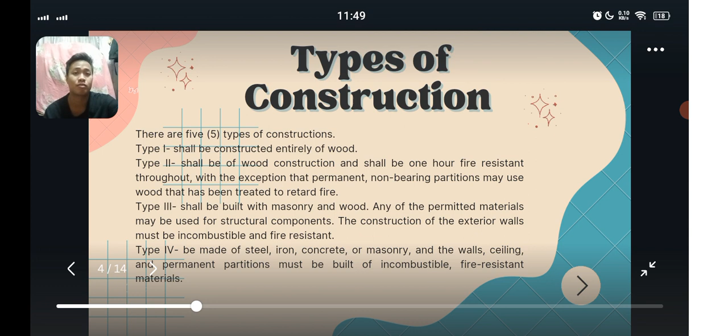So we're going to the next slide: fire resistive requirements in construction. Knowing the fire resistance of different types of building construction will help managers determine what type of building is good for their business. This helps by lessening the risk of loss to the business and preventing it as well.

Of course, when it comes to business, we need to lessen the risk so we don't suffer losses and we can prevent it before it happens. So that's for fire resistive requirements in construction.

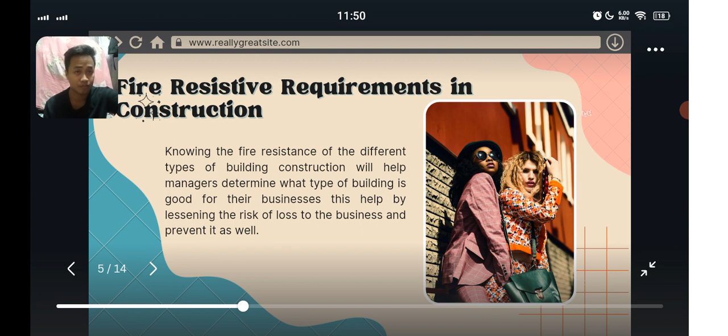Fire resistant standards. So we have six: floor construction or solid RC slab, solid pre-stressed concrete slab, partitions, protection for metal structural members, exterior wall, and the last one is column.

So fire systems, all building materials as well as their types, assemblies, and combinations must adhere to the fire system resistive rating. Kailangan na sobrang resistant siya when it comes to fire. Hindi dapat basta-basta matatalo ng apoy yung nag-aawang building o masusunog agad-agad. Kailangan mo talaga ng pinaka-advanced na fire resistance in a building.

To maintain the fire integrity of neighboring structures, all existing openings on all firewalls must be completely sealed. Kailangan nakaseal yung buong bahay, which is walang bintana sa likod o sa gilid ng mga bahay, para kung may mangyari man na sunog, yung apoy ay nasa loob ng bahay lang, hindi na siya kakalat pa. So depending on how the building is used, particularly for ventilation, there are exceptions.

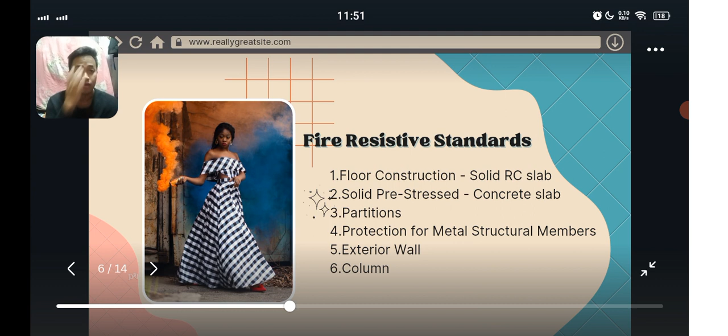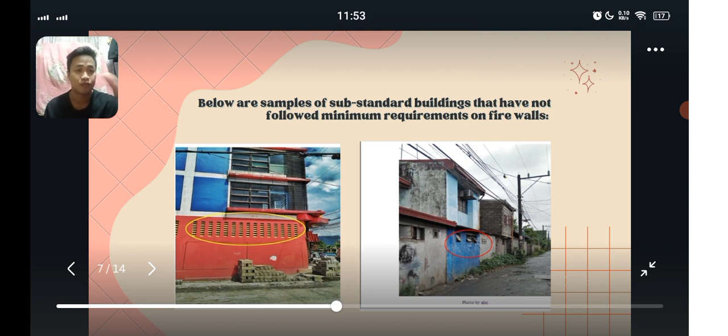Below are samples of substandard buildings that have not followed the minimum requirements of firewalls. Itong mga nakabilog ay yung mga hindi nila sinunod. Hindi ito pwede kapag nagbuild ng building, kasi maaaring lumabas yung apoy at kumalat sa mga katabing bahay. So that's the example of not following the minimum requirements of firewalls.

So, maximum building heights. The proposed building's maximum height and number of stories will depend on the type of use or occupancy, the type of construction, and the following factors: end user population density, light and ventilation, width of roads and streets particularly its roadway, carriageway component, building bulk, off-street cum off-site parking requirements.

The maximum height and number of stories of a proposed building in relation to environmental factors, local zoning laws, and land use plan, which includes geological, hydrological, meteorological, or topographical factors. Then the next one is current traffic situation, availability and capacity of public utility and service systems.

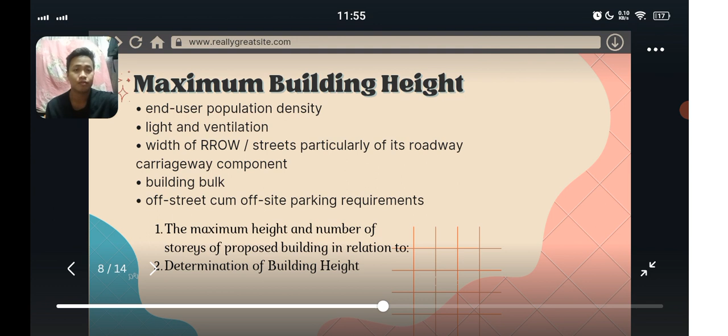And the next one is determination of building height, which is building height limits, or BHL, are generally calculated from the established grade line to the topmost part of any proposed building or structure, and they must comply with the NBC rule. So that's for maximum building heights.

So the example of it is these pictures. The first one is the highest adjacent natural grade, which is ground surface or finished grade, and side of surface perpendicular to row with a difference in elevation of less than 3.00 meters shall be used to determine grade elevations. The next one is the average grade level, established grade elevation for sloping grades perpendicular to row with a difference in elevation of more than 3.00 meters.

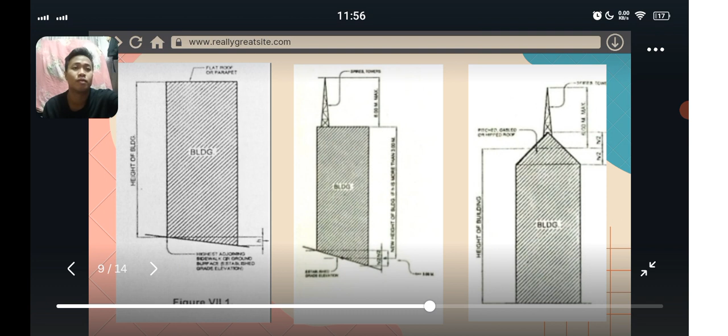The height of proposed buildings and structures shall also be governed by the following road-based limitations. Regardless of use or occupancy, lot size and dimension, etc., a BHL of 3 stories or 9.0 meters maximum shall be observed if only one road serves a lot and such road is only 6.00 to 7.00 meters wide. If a lot has one road and that road is only 4 to 5 meters wide, a BHL of at least 2 1/2 stories or 7.50 meters must be observed.

Kailangan natin siyang i-observe kapag nasa 7.50 meters na siya. If a lot only has one row and that row is only 3 meters wide or less, a BHL of 2 stories or a maximum of 6 meters must be adhered to. Kailangan din natin siya i-adhere.

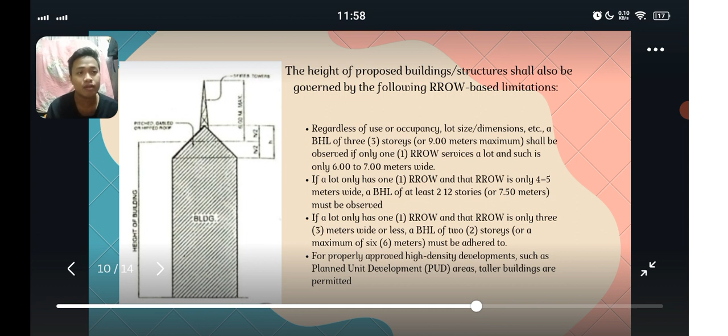The following factors shall also be considered in the determination of building height. First is soil characteristics: a lot's proximity to volcanoes or fault lines, or its location in relation to earthquake belts and other geological factors. The site's water table and distance from waterways and shorelines are examples of hydrological conditions. Ito yung binanggit natin kanina na fault siya. Dito sa may fault, dito sa may first part, ayan, nandito na siya.

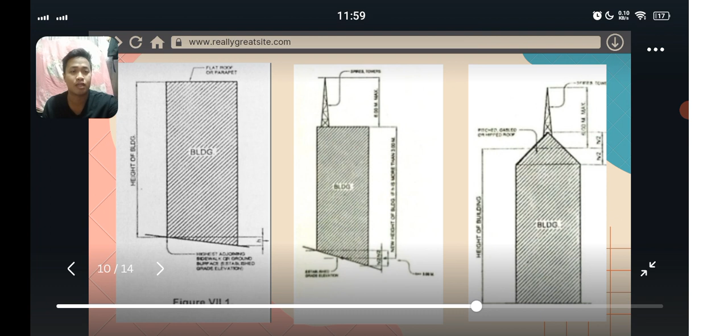Next, the third one is prevailing wind speed and direction, relative humidity, and how frequently and intensely destructive typhoons, monsoon winds, and rains occur. Kailangan matibay talaga siya. So, effects of environmental factors on a building or structure and vice versa, along with efficient air, noise, and thermal pollution control, heat management, light and shadow management, etc., and the enhancement of natural light.

The last one is building structure and traffic conditions and vice versa, as well as ensuring parking and loading requirements are met in accordance with the rules. So that's the following factors shall also be considered in the determination of building heights.